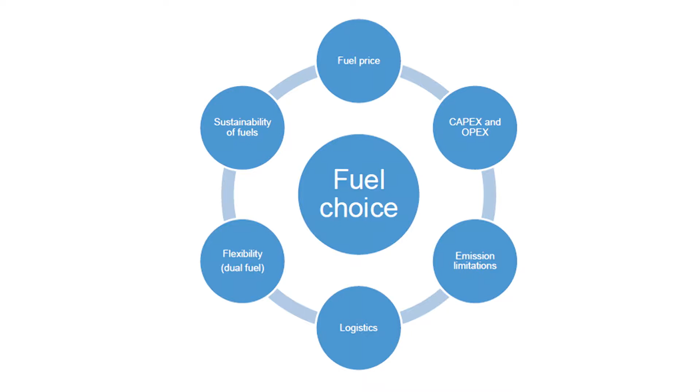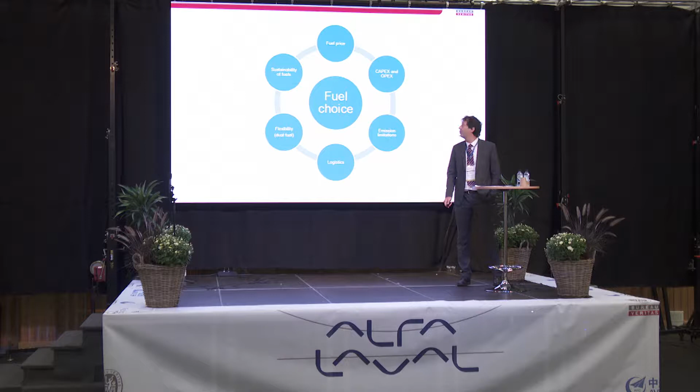So, the decision of choosing a fuel is based on different topics. Fuel price, CapEx and OpEx, meaning the money the company has to invest to install a new system and the operational expenditure. Emission limitations, so the regulation, the logistics, the flexibility that the fuel choice will give, and the sustainability of the fuels. And last but not least, the fuel price.

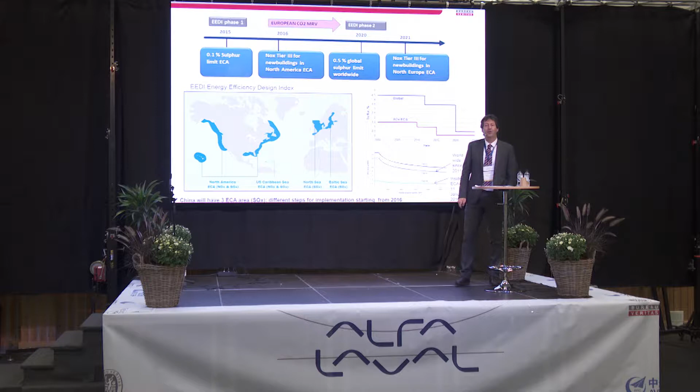We have heard today already that 2020 will be a milestone for the implementation of the regulation, along with the implementation of new emission control areas in 3 zones in China starting from 2016. So the restrictions on emissions, NOx, SOx, etc., are becoming more and more stringent, and there will be no further delay in implementation of new regulation.

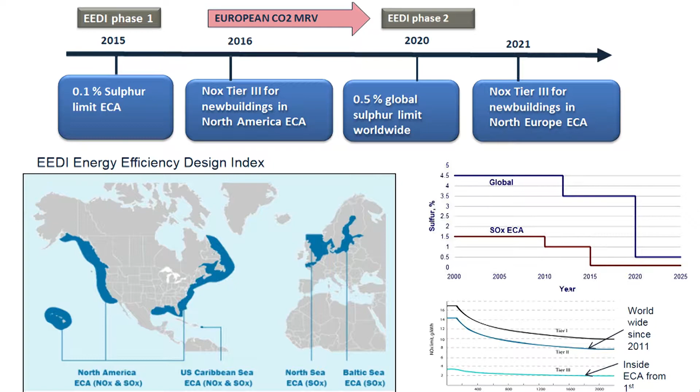So we have 3 options. The main option now is the use of traditional heavy fuel oil with an exhaust gas treatment unit like a scrubber; the use of low sulfur heavy fuel oil and treatment units, or marine gas oil in European ports when required to go down to 0.1%. The third option is LNG as fuel.

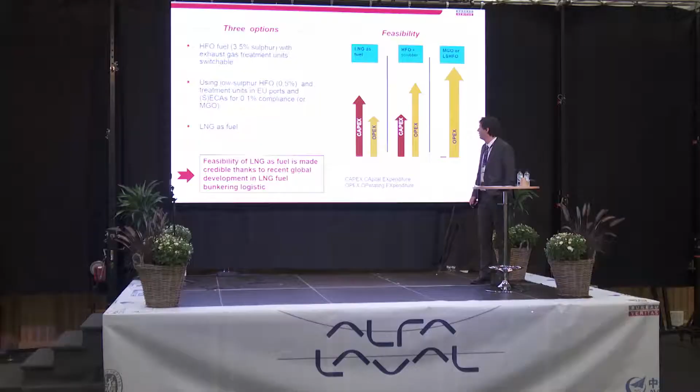Here there is a diagram giving an estimation of the cost for companies to use one of the 3 options. Of course, using MGO, marine gas oil, is only an operational cost. It will require no changes to the ships. Scrubbers will require cost for implementation and installation of the system, with operational cost lower compared to marine gas oil, but still high.

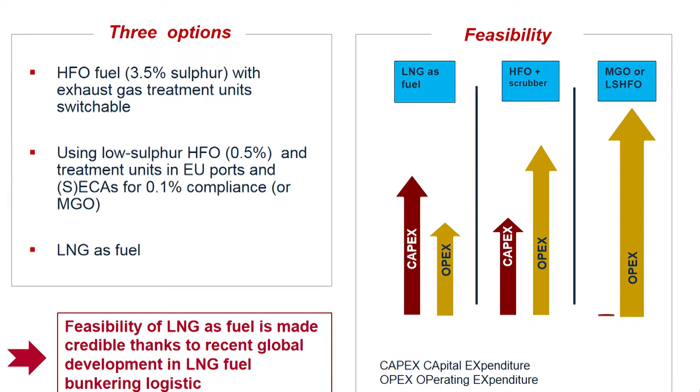LNG in new construction or in conversion of ships will require higher installation cost, which will be gained back later in the operational cost, estimated as the lowest of the 3 options. So the global and recent development in availability of LNG and bunkering infrastructure has now made LNG really a main actor as a fuel.

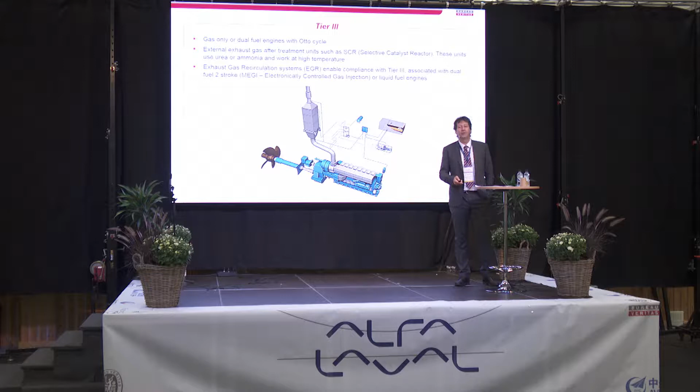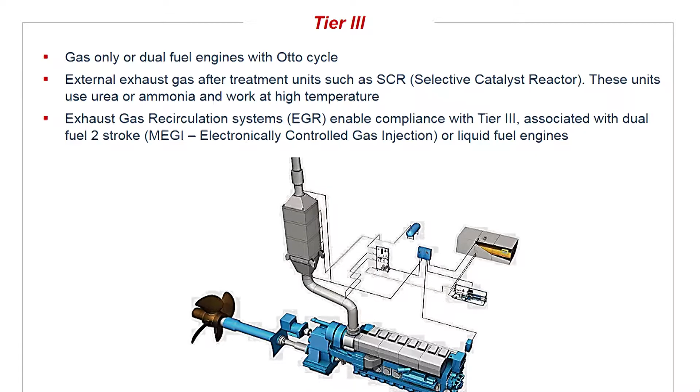Here, just to mention that Tier 3 requirements can be reached with the use of gas, LNG or other types of gas, or dual fuel engines running on the Otto cycle. Other systems need different arrangements to comply with the Tier requirements, which are about NOx reduction. So the possible solutions, as we said, are the use of low sulfur fuel oils, the use of LNG, or installing a scrubber and using heavy fuel oil.

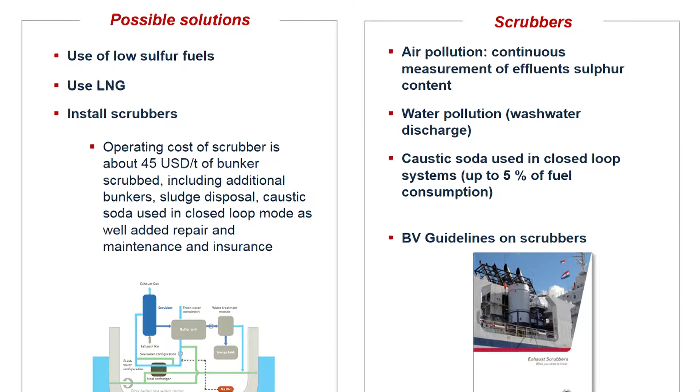What are the advantages and disadvantages? All three options, of course, have advantages and disadvantages. Let's see some about scrubbers. There is a need for continuous measurement and recording of the sulfur content of the effluent. There is the risk of water pollution when we discharge the water from the scrubber system, and the use of caustic soda as a chemical additive when we use the system in a closed loop. So operational requirements are quite high.

Needless to mention that BV provides guidelines on the installation of scrubbers. What, on the other side, are the disadvantages, for instance, of having LNG as fuel?

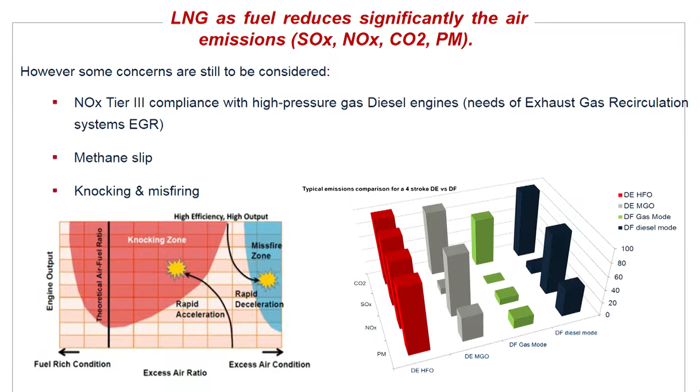The compliance with NOx Tier 3 requirements is only with the low-pressure engine. For high-pressure gas diesel engines, based on diesel two-stroke, an exhaust gas recirculation system is needed, so additional expenses. There is a risk of knocking and misfiring in the engine, but of course the main engine manufacturers are developing on this, and this will be reduced again and again.

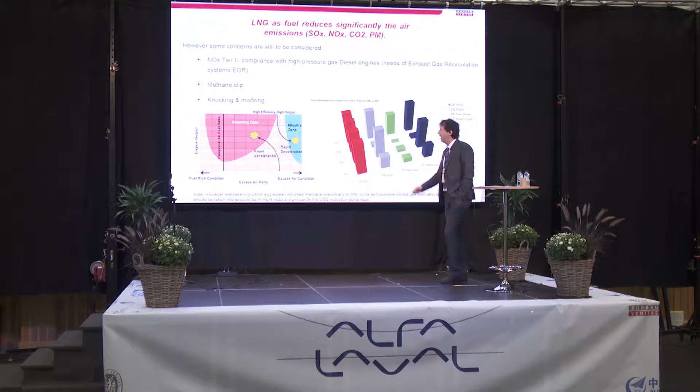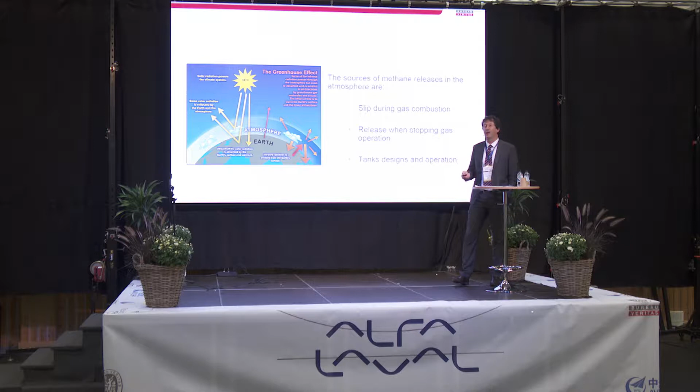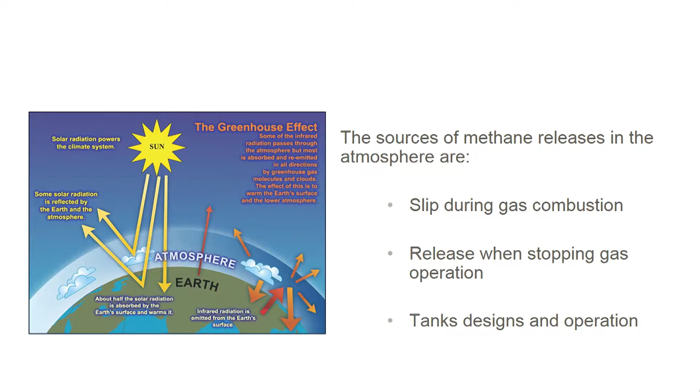And one of the biggest risks is the methane slip. What does methane slip mean? Methane, so LNG, is actually one of the worst gases for the greenhouse effect, much worse than CO2. So the risk is that during some operations of the ship, we actually have methane slip into the atmosphere, losing some of the advantages of having LNG as a fuel. This could be during normal combustion, when stopping the gas operation and changing to dual fuel, or starting and stopping the engine, due to some tank design and operations, or during bunkering.

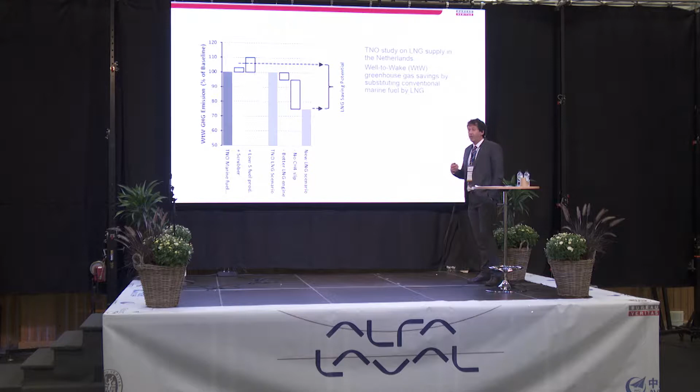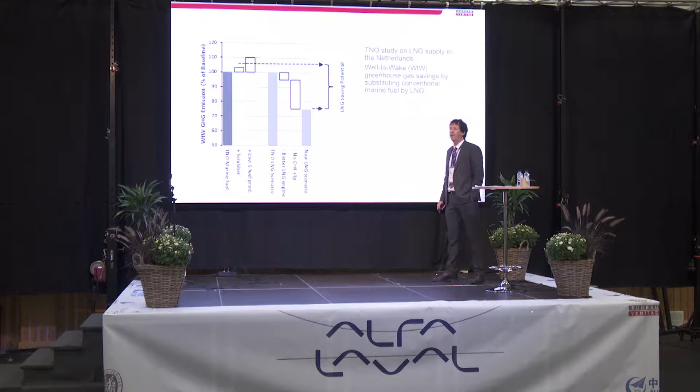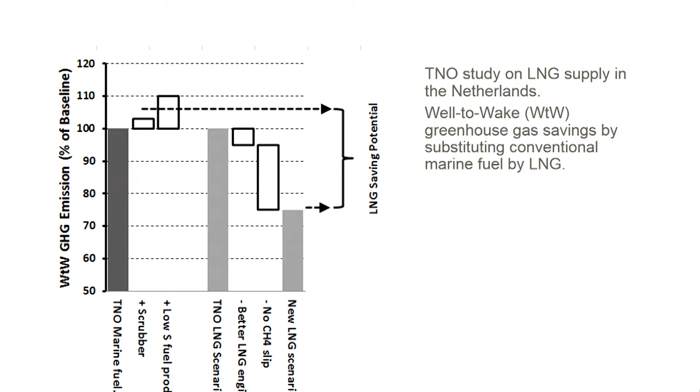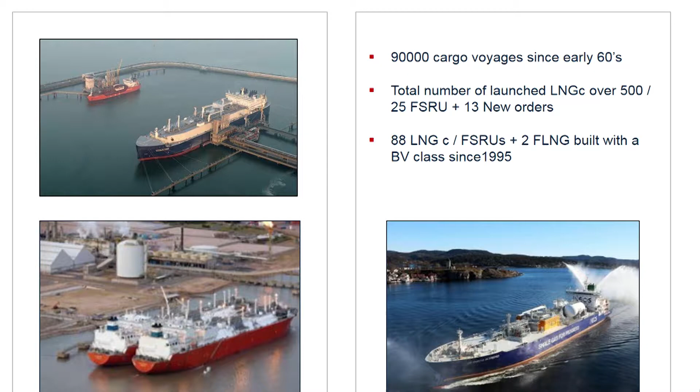So why LNG as fuel then? First of all, you cannot see the top of the line over there, but because there is a good safety record now. 90,000 cargo voyages since the early 60s. Total number of launched LNGc over 500. I'm not going to go on with numbers. But basically, the LNG system and LNG propulsion has proved so far to be reliable and safe.

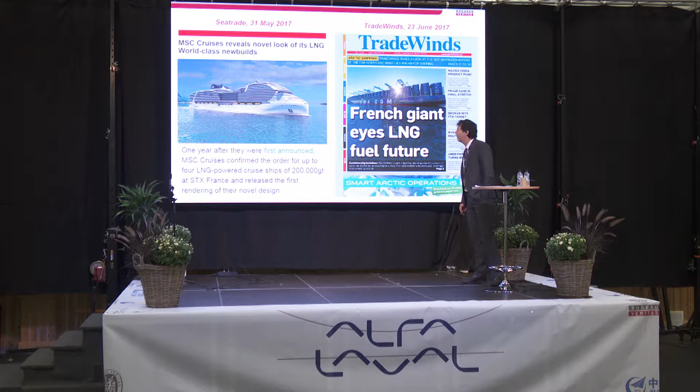The other thing is that other main actors, with different types of ships, are turning to LNG as propulsion. For instance, MSC Cruises, who will build new cruise ships with LNG propulsion, or big container companies, like in this case, CMA-CGM.

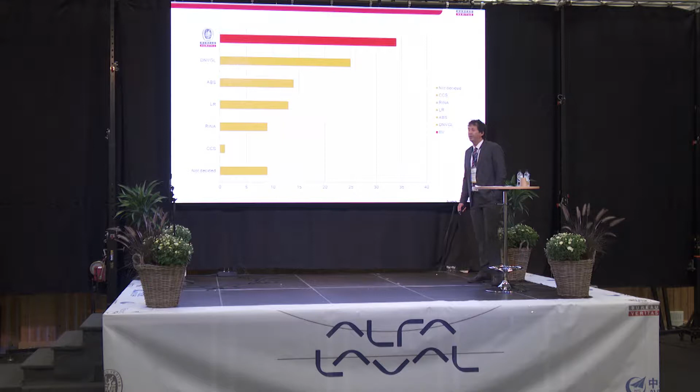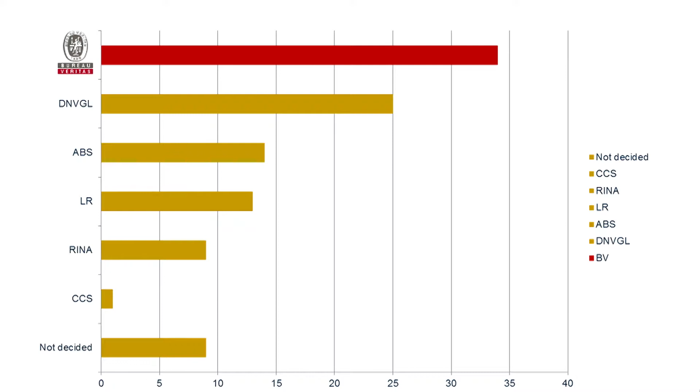Bureau Veritas is one of the leaders in the order and delivery of LNG fuel ships of different sizes. Here, again, it is on the top of the line. Here is the number of ordered ships with LNG propulsion in 2017 up till June. So BV has the biggest share of the market. And the total fleet and order book as per March 2017 is over 200 ships, and BV being the class market leader in 2017 for LNG fuel ships. And they go from smaller ones, tugs, to bigger passenger ships or cargo ships.

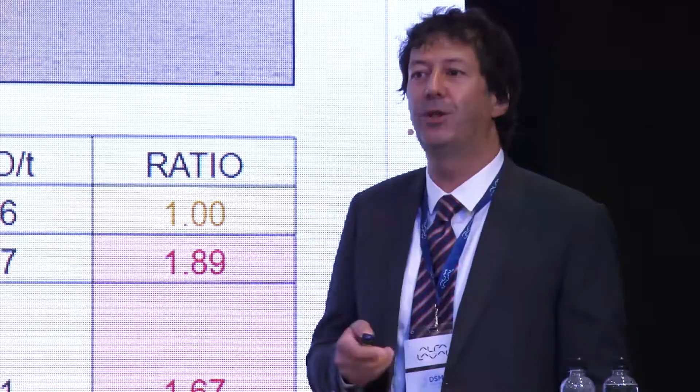So, which are the factors that so far have hindered the development of LNG as fuel? And why are these three factors now being reduced, so we can optimistically look at LNG as the fuel of the future? First of all was the uncertainty on dates of implementation of regulation, and this uncertainty has now been cleared, so 2020 will be a milestone, creation of emission control areas, etc.

The lack of LNG infrastructure and the lack of possibility of bunkering. This, of course, is still an issue, but it is improving. More and more companies are investing in bunkering. We have a ship at DONSO port now called Coralius that is a bunkering ship for LNG.

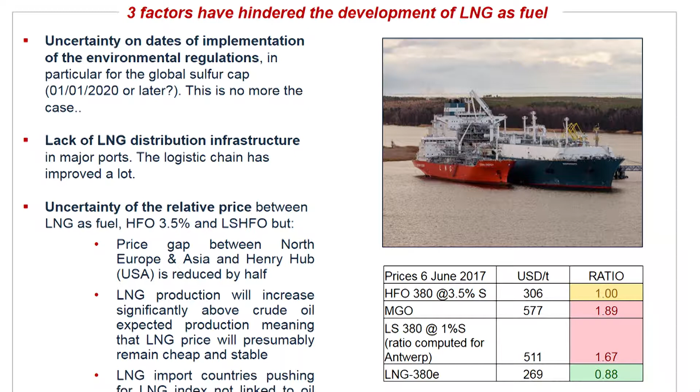And uncertainty about the cost of LNG. Will it be convenient in the future to have LNG, or will the price level compared to marine gas oil and heavy fuel oil not give any advantage anymore? So far, for the time being, LNG is still the most convenient fuel. And probably in the future, given the availability of LNG as a resource, this will not change.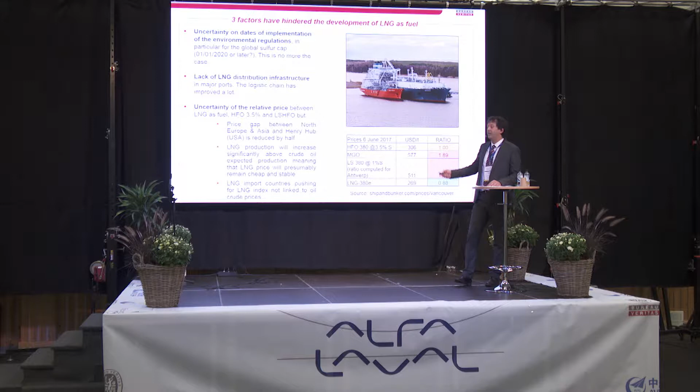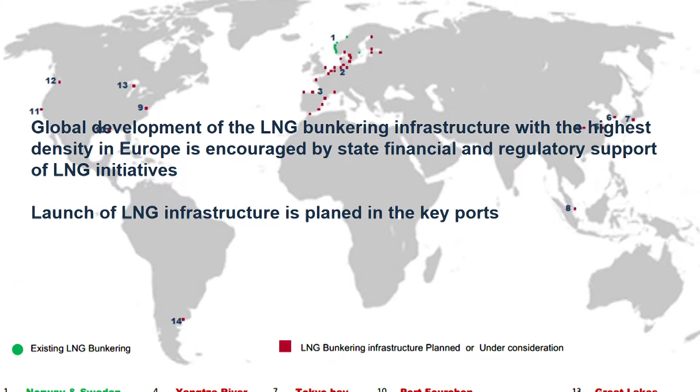In this map, you can see in green the infrastructure already available for bunkering, and in red, infrastructure that is under construction or will be developed soon for bunkering LNG. So, as you can see, key ports will be covered by the possibility of bunkering LNG.

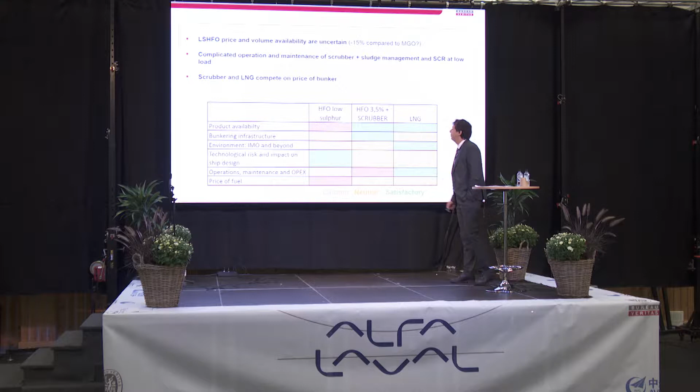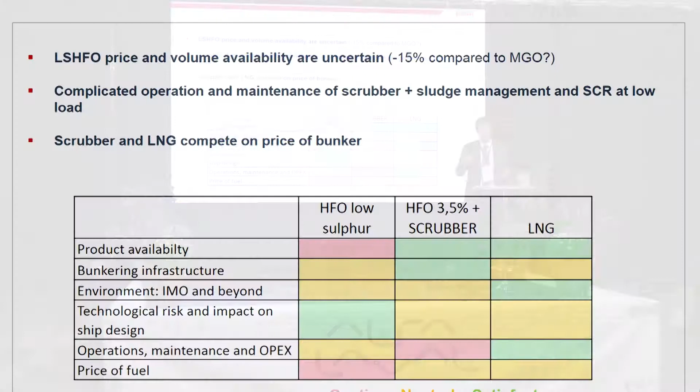This scheme here provides a short comparison between the three options, heavy fuel oil, low sulfur, heavy fuel oil with scrubber, and LNG, and their problems. So, for LNG, we can say that there is no area of caution. Low sulfur heavy fuel oil is not always available. It's not available everywhere so far. And there is always a big fight because the companies are not ordering low sulfur heavy fuel oil, so the manufacturers are not producing it, and that keeps the price high. But LNG has no caution area so far, in our opinion, of course.

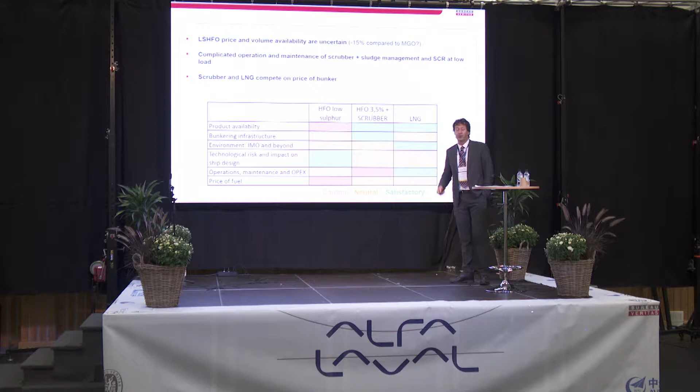So both in product availability, bunkering infrastructure, environmental effects, technological risk, and impact on ship design. Of course, there will be an impact on ship design, but it is well known. Operation, maintenance, and cost of operation of the unit, and the price of fuel. None of these areas are actually critical.

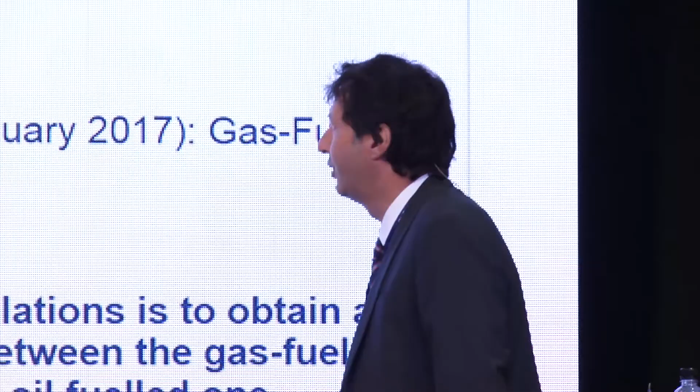So, let's see what type of rules are behind LNG as fuel. First of all, IMO regulation, the IGF Code from 2016, BV rules that has developed their own Rule Note 529 for the use of LNG as fuel, and then, not mentioned here but in the following slide, IGC Code and SOLAS, of course. What's most important, the base of this, is that the safety, reliability, and dependability of the system shall be equivalent to that achieved with new and comparable conventional oil fuel main and auxiliary machinery.

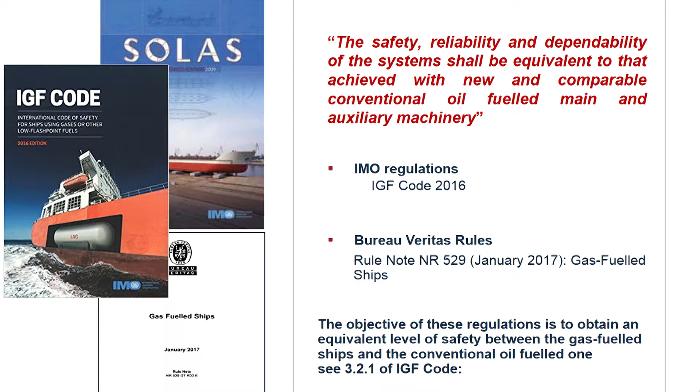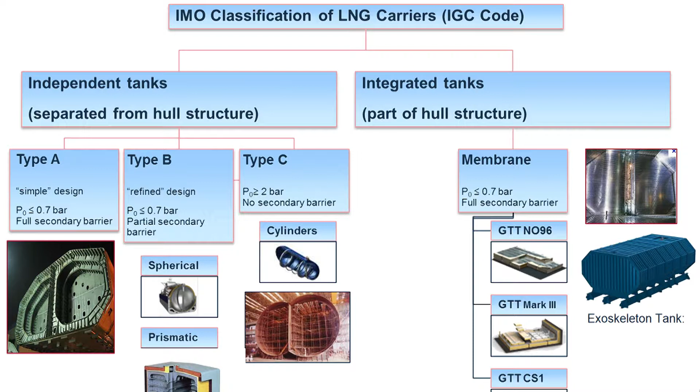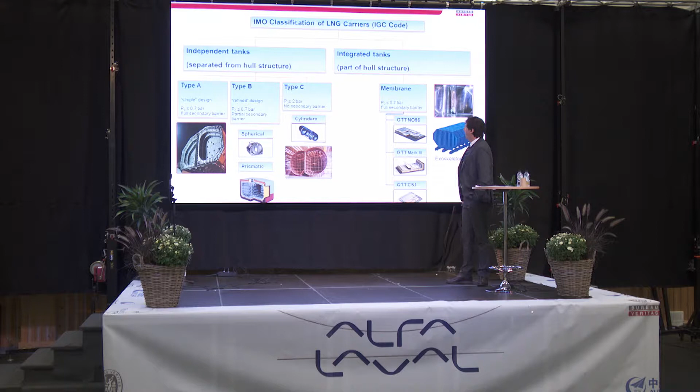So the scope of all the rules is that the use of LNG as fuel must be as safe as the traditional system. This is the aim of the rules developed. I will skip this. These are some of the types of LNG tanks that could be installed according to rules on board ship. We go from independent tanks to integrated tanks. The most common so far is Type C tanks, so pressure above 2 bar with no secondary barrier. Other types are, of course, also in use.

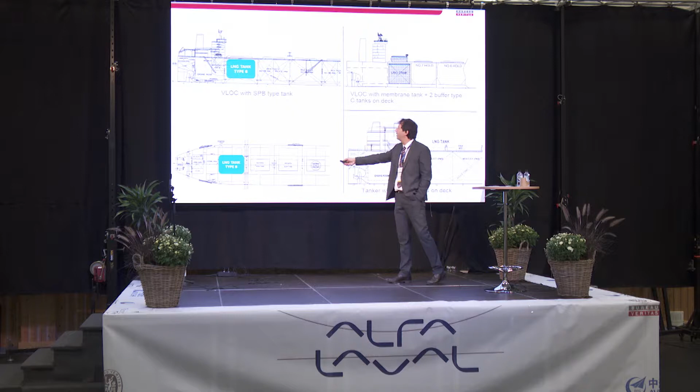Here we can see 2 examples of installation of an LNG tank Type B, so integrated tank on a bulk carrier. Here are 2 types of tank on a very large ore carrier with one tank Type C and one tank Type B.

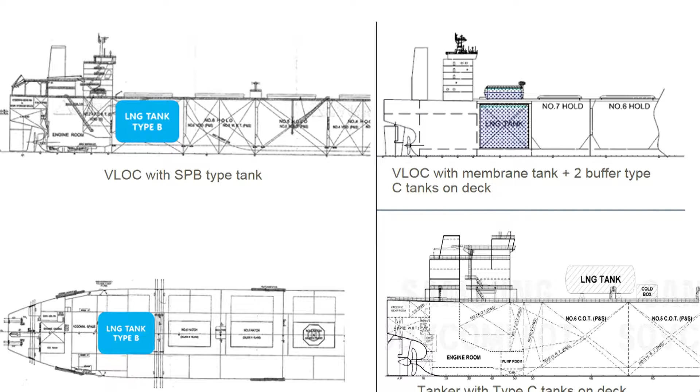Most important when addressing the design of an LNG fuelled ship is the position of the LNG tank, that is done mainly to avoid any risk in case of a collision. And this system is developed with a probabilistic approach, developing rules based on experience and actual design.

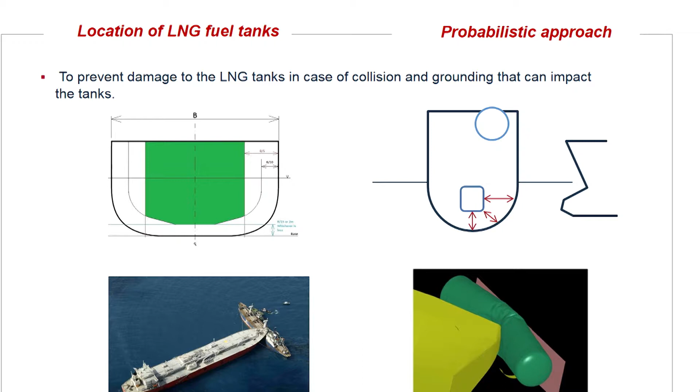One of the latest projects developed by BV is a tug with LNG propulsion. A few words about this. Why tugs with LNG propulsion? This is for a refinery in Norway, so a very difficult environment. It's important because the use of tugs in the port area requires more and more that they are environmentally friendly, so no pollution. And installing an LNG system on a tug is a challenge that was actually really well succeeded with these tugs.

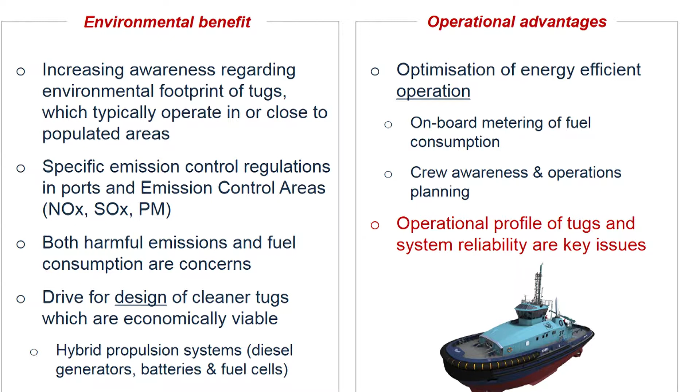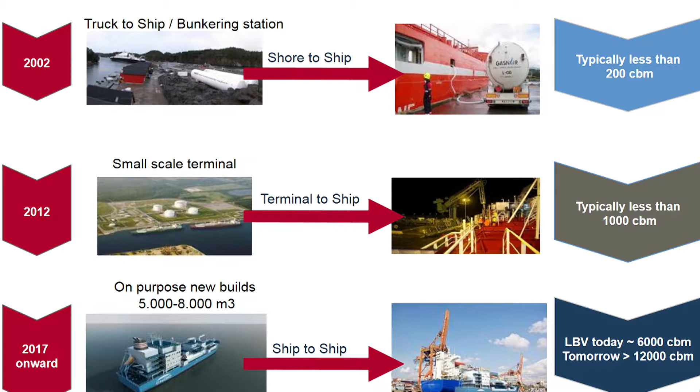Let's go further. Bunkering process. Through the years, we have gone from delivering bunker to LNG ships from truck, from terminal, and more and more ship to ship. This will be the future of delivering LNG.

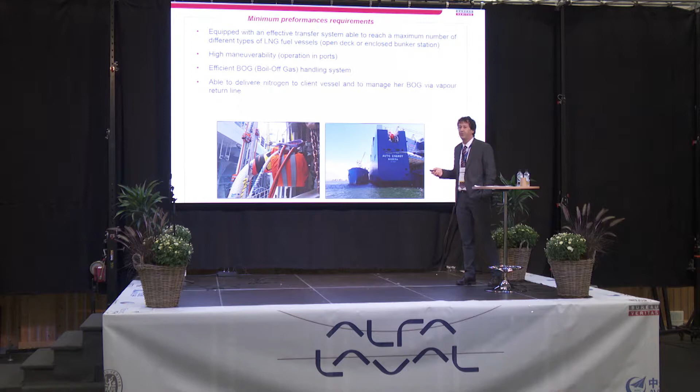Which are the minimum performances required of a bunkering unit? It must be equipped with an effective transfer system able to reach the maximum number of different types of LNG fuel vessels. So, flexibility. High maneuverability, of course, for a bunker barge. The handling of the boil-off, since there will be boil-off during bunker operation, and capability to deliver nitrogen for purging the lines.

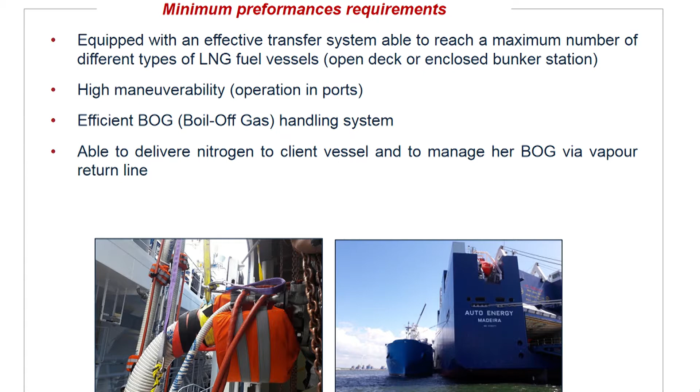And in addition to this, now under development is the SIMOPS specification. SIMOPS means the capability to do simultaneous operations to save time in the ship operation. For instance, can you imagine a cargo ship having to stop the operation to do bunkering? So having a risk analysis in order to be able to bunker the ship during cargo operation.

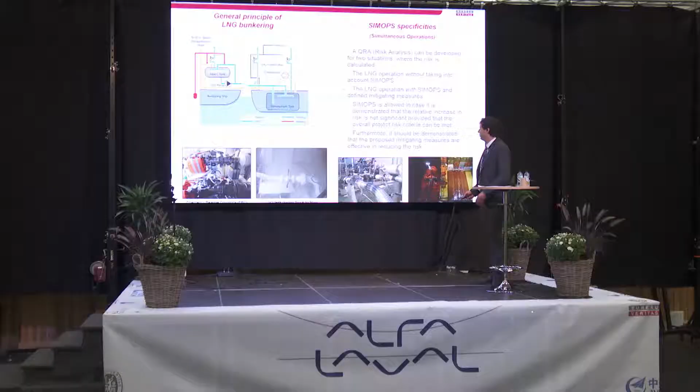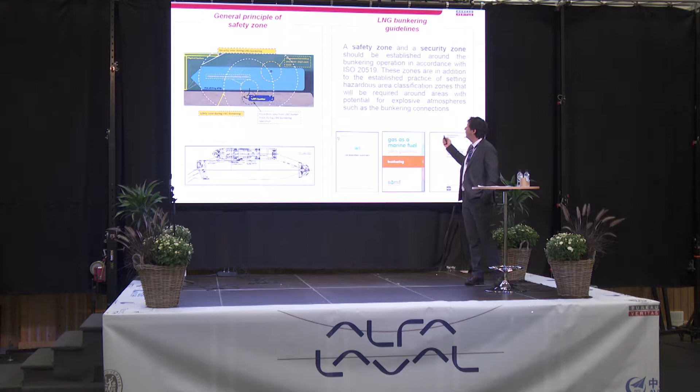There are bunkering guidelines under development to define the bunkering procedure, the definition of safety zone and security zone, so zones of the operation area that are sensitive to the bunkering. And ISO development on standardization of the equipment, LNG analysis, so fuel analysis, and standardization of the engine equipment.

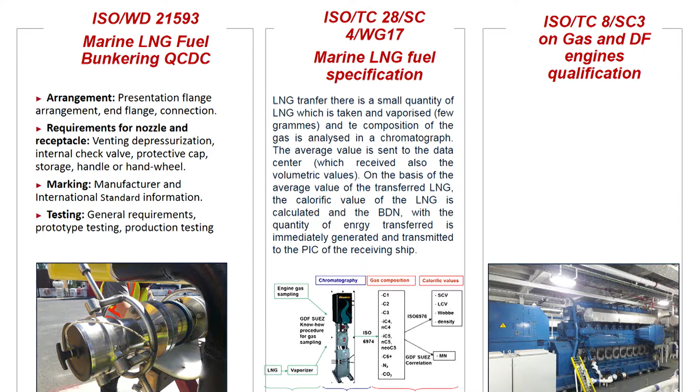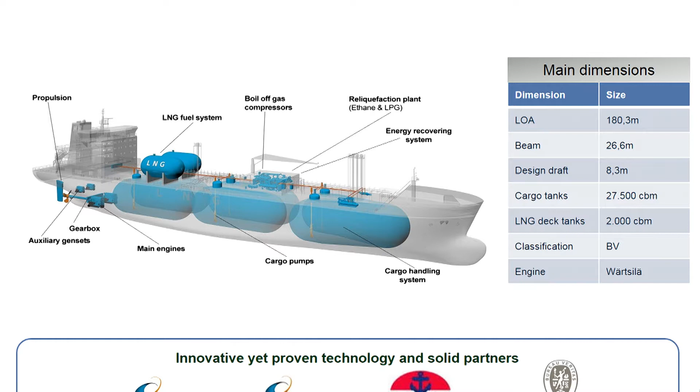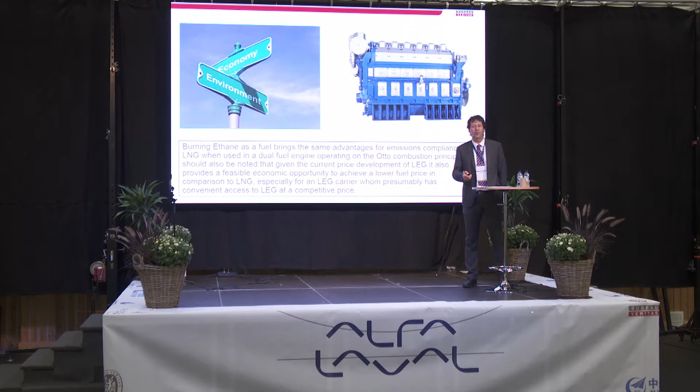The last part, in 1 minute, just a few other alternatives. One is the use of ethane, and we have some examples of ships delivered with ethane. So Ineos has delivered ethane carriers, and they have developed, together with the engine manufacturer and the ship's flag, in this case Denmark, the use of ethane as fuel. And this gives more or less the same result as using LNG. Of course, ethane is difficult. If you're not an ethane carrier, it's difficult to supply ethane as a bunker.

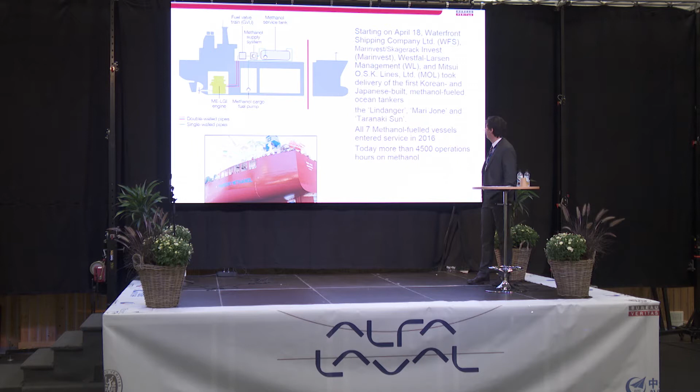Another option is methanol. Methanol presents some problems. Again, availability; it has low density compared to diesel, so it's used in a traditional diesel engine or in a specially modified diesel engine. It's toxic. It has a really low flash point and requires perfect cleaning of the tank and handling system. These are 7 ships delivered in Korea and Japan with methanol that already have 4,500 operations using methanol.

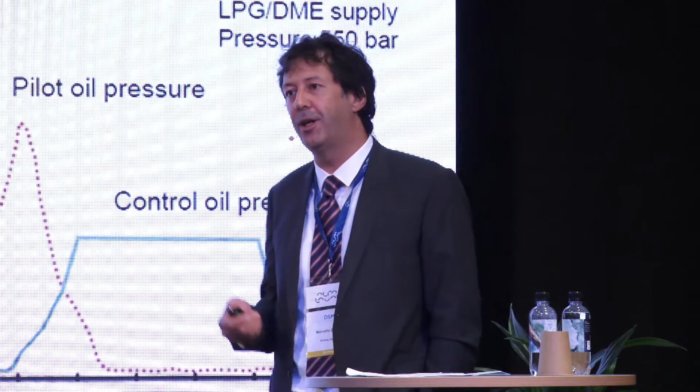The last system, and then my time is over, is the use of LPG, so liquefied petroleum gas, as bunker. And there are, I'm not going into details, modifications required on the engine that have been studied by some of the biggest engine manufacturers.